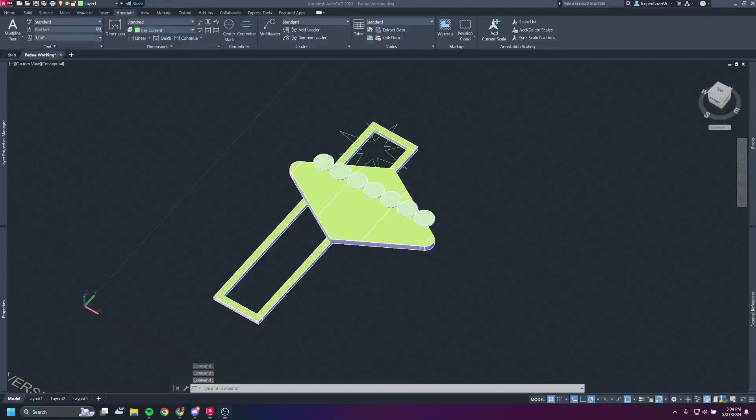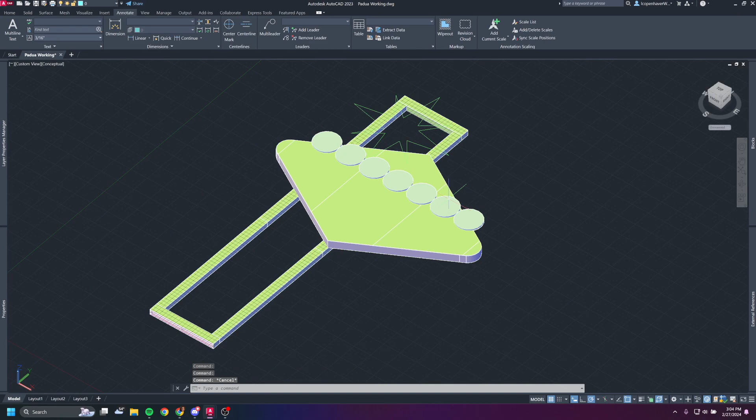Okay, I'm gonna record myself doing this thing so that maybe y'all can learn things or whatever. Oh man, okay, so this is grouped. Locked? Whatever. I'm just gonna copy and paste this into a new document because that's what you gotta do. New.

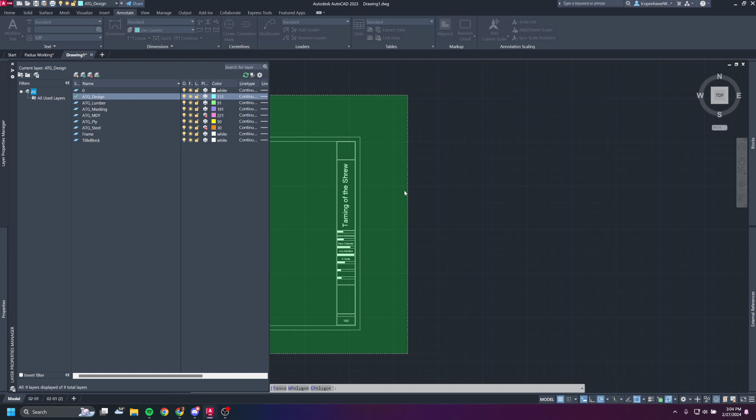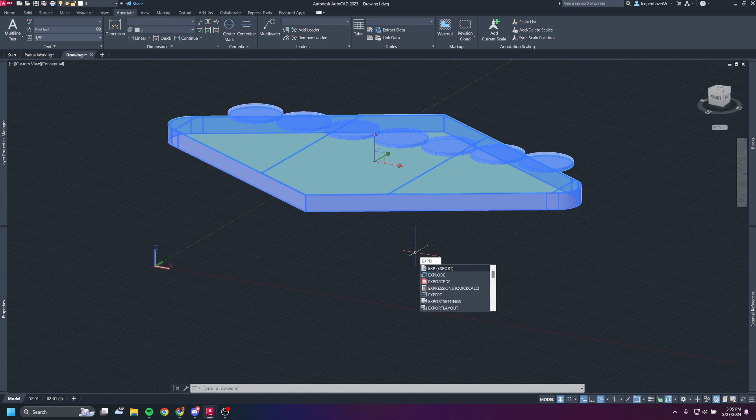Come on. Oh. Get rid of that. Oh my goodness, there's more. Get rid of that. Copy and paste. Put it at 0. Hello. ESC, so I can understand what I'm seeing. Alright, this is a block. I'm going to explode it so that I can get the different bits and bobs.

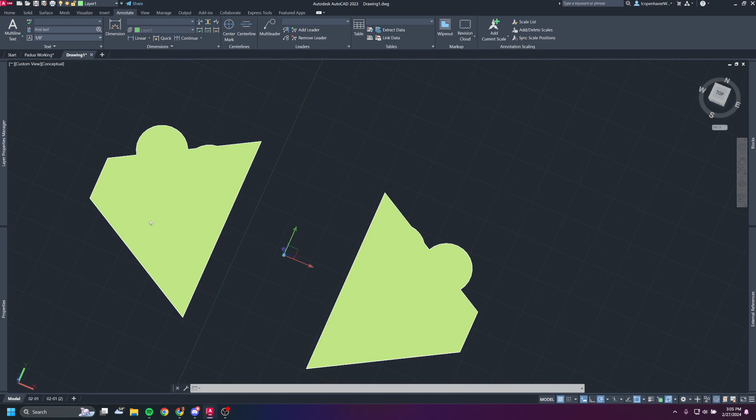I'm going to get that, get rid of it, get that, get rid of it, which leaves foam, nice, and then this fella, and also this fella, great, this fella, and these fellas here. I did not check if the seam catches have been updated. I really hope they have. If not, that sucks.

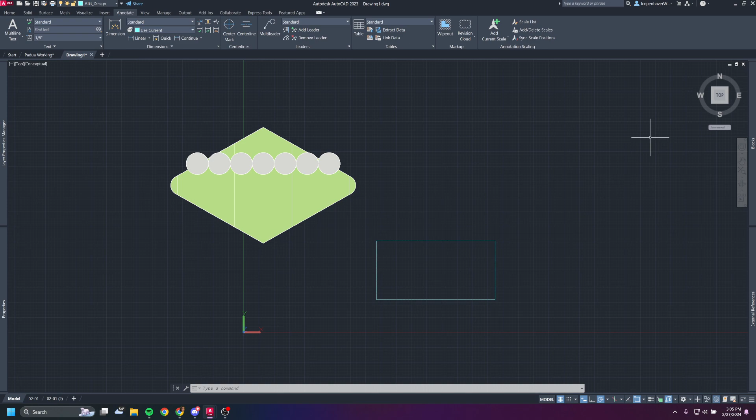Alright, the first thing I'm going to do is figure out exactly how these are going to fit onto sheets. So to do that, I'm going to give myself a template, or just like a representation of a sheet. The sheets are 97 by 49 because they just are. I'm going to put that at 0, 0. Oh, 0, 0. There it goes.

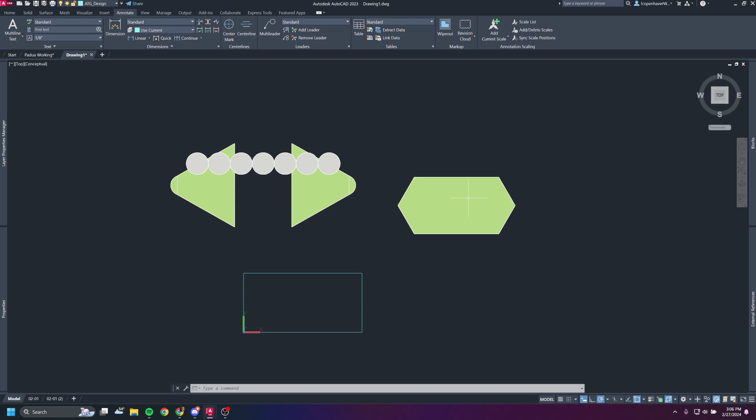I'm gonna turn some of this other stuff off too. Whew, my eyes are so much happier. So I'm just gonna take this and basically put it in the right place. And anytime you're doing this, it is a good idea to take the whole thing as it's going to be assembled, and then literally put all of the different parts where it needs to go, even if those parts are like multiple copies of the same thing,

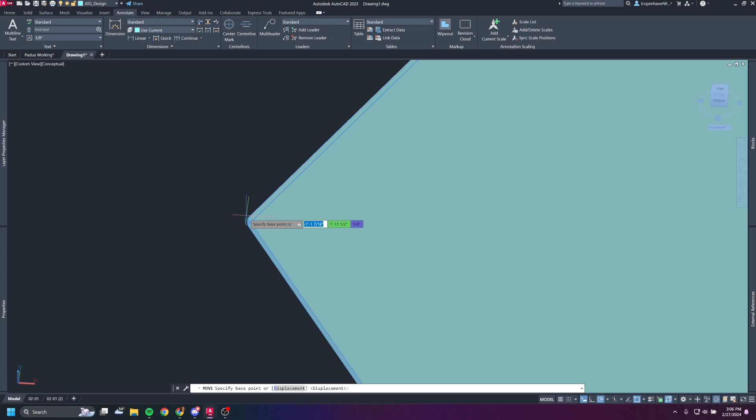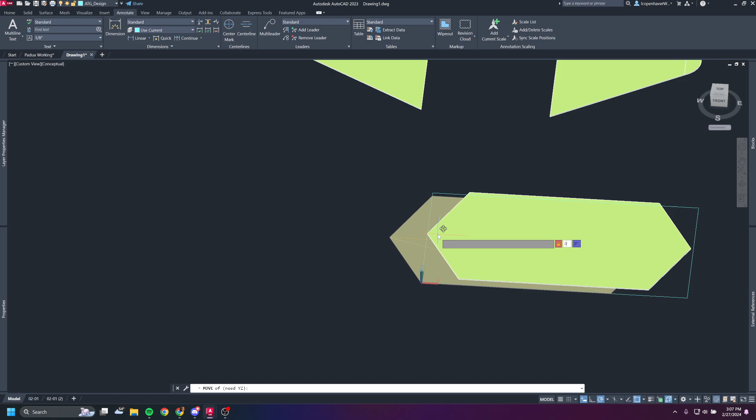because you want to make sure that you have the right quantity of them for the entire project. And it's frustrating when you make silly mistakes like miscounting things. So I'm moving this so that it's not on any edges in particular. We want to make sure that the CNC is actually getting the right cuts.

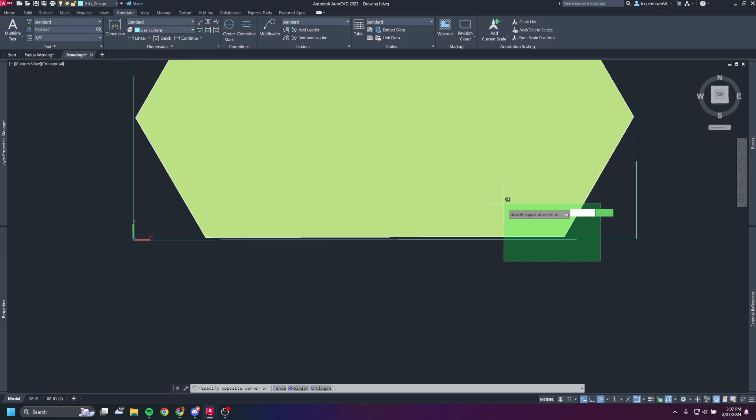So if this is up against the edge, but the sheet is on the CNC ever so slightly off, then it's not going to be accurate. So we want it to be accurate. So therefore, leave edges, friends. Move that another half inch. Half inch is plenty. You don't need to worry about more than that.

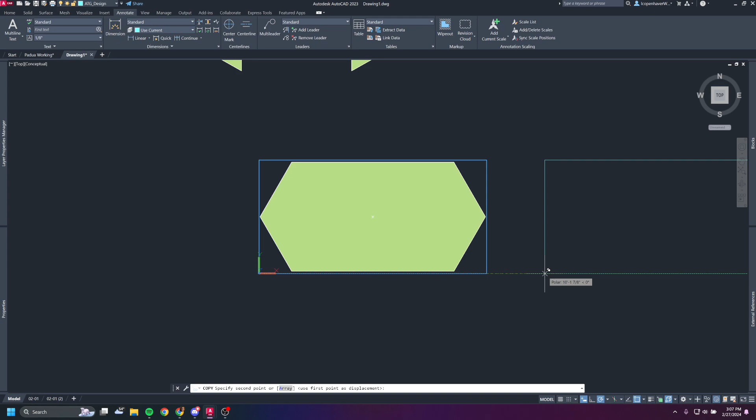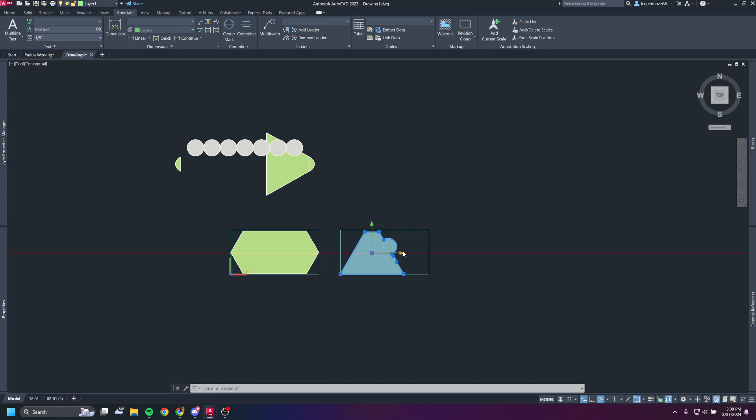I'm going to duplicate this, and I'm going to move it 120 inches. It doesn't really matter exactly how far you go, just as long as it's more than the width of your sheet, and it won't overlap.

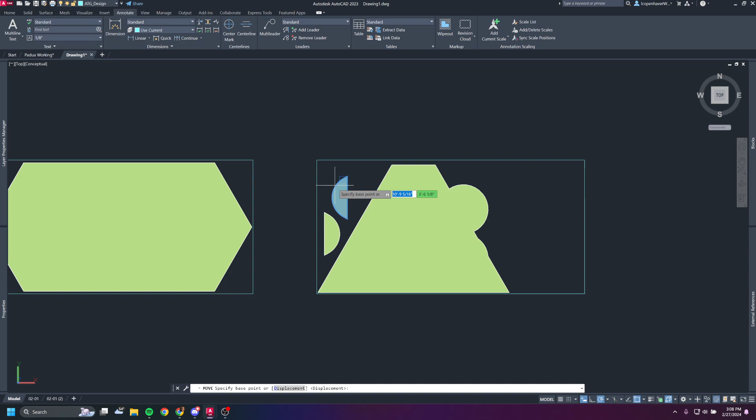Since the material we're using is MDF for this, we don't have to worry about grain orientation. When we do the layout for something like

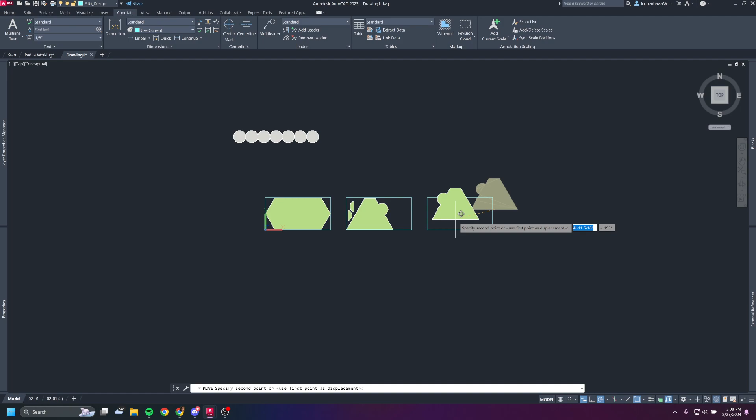I don't know why this is so choppy, but it's super choppy right now, and I don't care for it. Yeah, that's fine. Alright, I'm going to hide those.

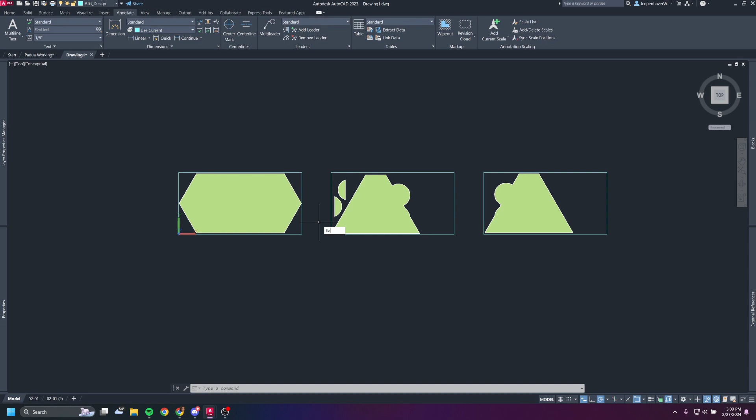Alright, I'm going to do a thing right now called Flatshot. And Flatshot is just going to take the image of whatever is there, and then make a 2D representation of it. It's really important that you're in the correct orientation when you do this. I'll show you why in a second. I'm going to put it at 0, 0, 0, 1, 1, 0.

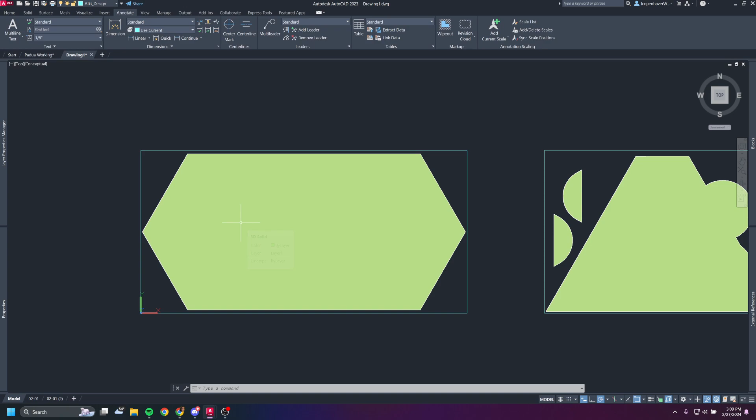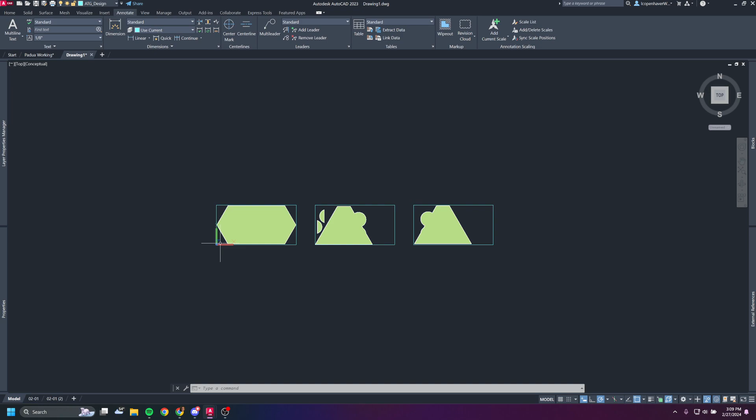Oh no, did it not place it? It did not place it. Fart. One, tab, 1, 0. It didn't like the tab. So now I can get rid of those, and what we have left is a block of those flat shapes. You need to do that because V-Carve doesn't like three-dimensional shapes.

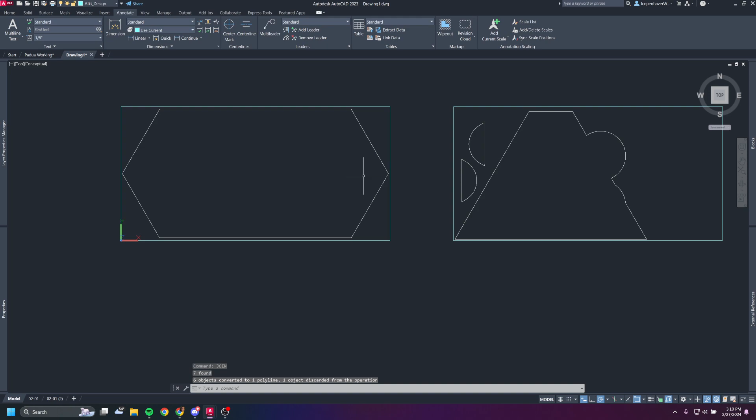I need to make this not a three-dimensional shape, so I'm going to explode it, and then I'm going to join it back together. When you join it back together, you want to make sure that it will extrude. You do that because if you don't, and there's an open line, then V-Carve will not understand which side of the line you want it to cut on, and it will be sad.

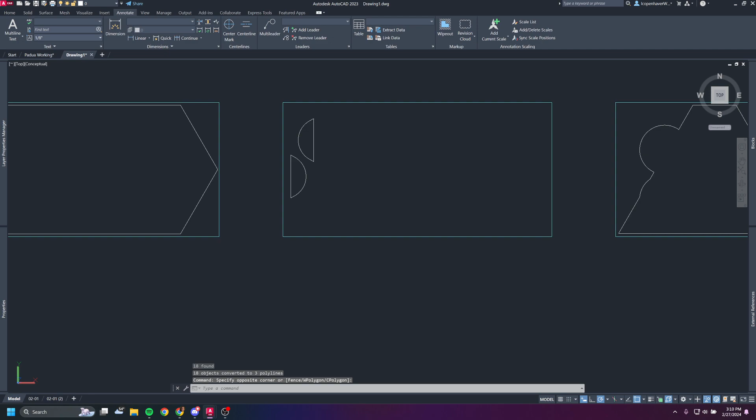For the most part, this is usually just an exercise in exploding it and then joining everything back together. Sometimes it gets pissy and then you have to do a boundary command. In this case, it's fine.

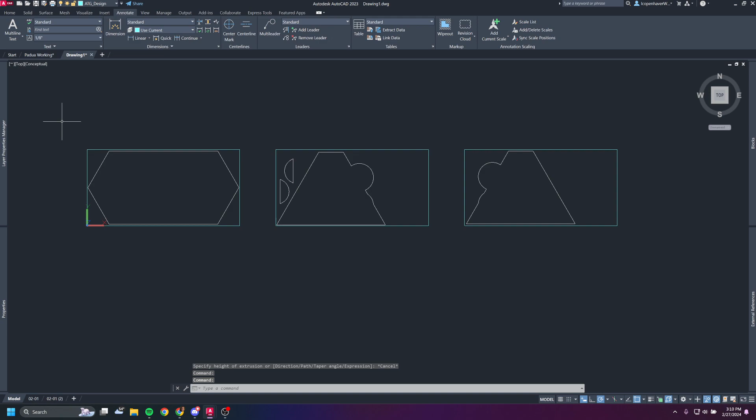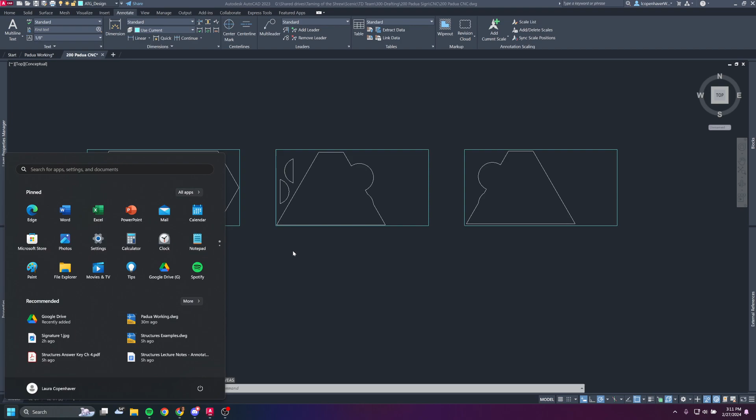Great. So now that I have that, I'm going to save this as, I'm going to put a new folder in your thing that's called CNC. I'm going to name it something that's logical and save it as a 2013 file. And now I'm going to open V-Carve. We're going to open an existing file. And it should open. Nice.

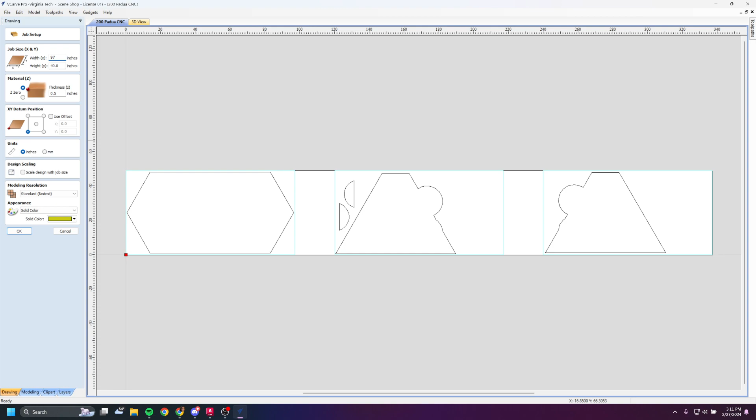So this first page is where we tell it how big the material is that we're going to use. I'm going to set that to 97 inches. The thickness is 1/4 inch because we're using 1/4 inch MDF. And make sure that the Z0 is to the bottom of the material. That's the same thing as going to the CNC bed rather than to the top of the material.

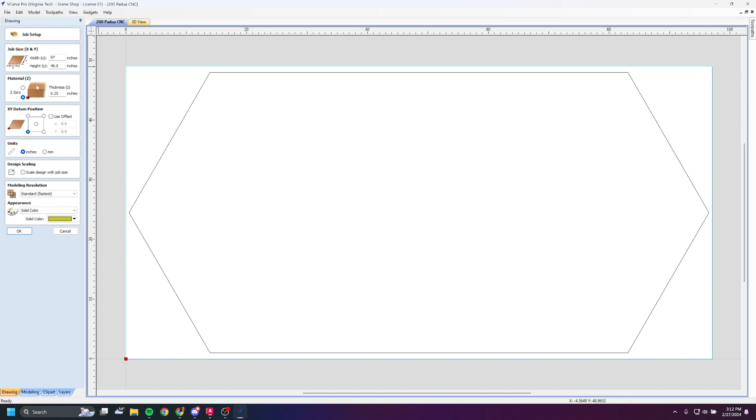We do that because that way we only have to zero it at the beginning, and it's also better if you're doing through cuts, which is exactly what we're doing. The rest of this can stay. Just make sure that your main material size is correct, that your Z0 is correct, and that your thickness is correct. Then click OK.

We're going to open toolpaths right here, pin it open, and then I'm going to start selecting the paths that I want it to cut, and then start creating toolpath operations. These are a whole bunch of different things that it can do. For this one, I'm just going to cut a profile. That means to cut outside of an edge or inside of an edge.

So start depth, leave that at whatever it is. Cut depth, however deep you want it to go. So in our case, we want to go all the way through, therefore 1/4 inch. You need to select which tool you're going to use. In this case, we're going to use a 1/4 inch end mill. That'll let us cut a little bit faster. And since we don't have any tight inside corners, it doesn't really matter.

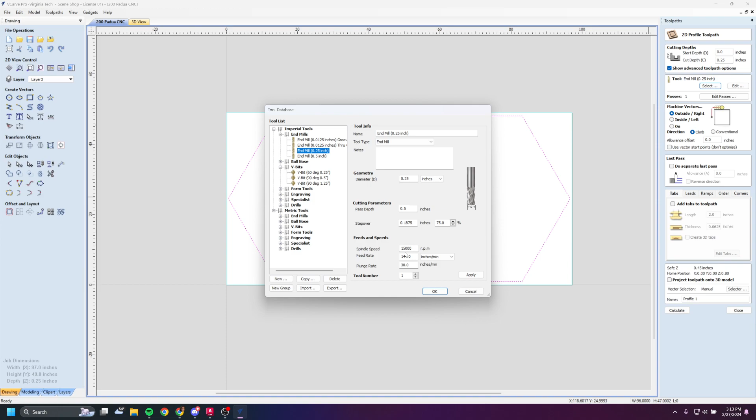If the thickness of the line is important, or if the smallness of the corners is important, then you can change size. But for us, it doesn't matter. I think I'm going to leave this stuff where it is for now. I have been known to actually sit down and calculate this stuff and up my feed rate, but for now I'm not going to go into that. Just leave it what it is.

The next field is, oh, we do need to talk about this. The rule of thumb for cut depth is that your cut depth can be as much as 2 times the diameter of your bit. So in this case, I could make a 1/2 inch deep cut. I'm going to be honest. I think a lot of times that results in cuts that don't look very good and they're not very clean. So I would rather do a second pass, especially on something that's this easy.

Don't bother making it super fast. Make it look good so that it saves you time later. Like you spend less time having to clean it up. So in this case, it doesn't matter. We're using a 1/4 inch to cut through 1/4 inch material. 1 pass is fine. We're going to do outside right. That means that the bit is going to travel on the outside edge of this line all the way around. And then we'll leave this at whatever it is.

We could totally talk about this. I can tell you in person. I just want to leave it.

For something this large, I can almost guarantee that we're going to put a couple staples through it, which means that I don't have to worry about it moving around on the board. And by staples, I actually mean composite nails. They're not the same, but we're just going to say staples. For something smaller, we would probably want to do tabs. For this, I'm just leaving it at what it is. I'll show you tabs in a minute.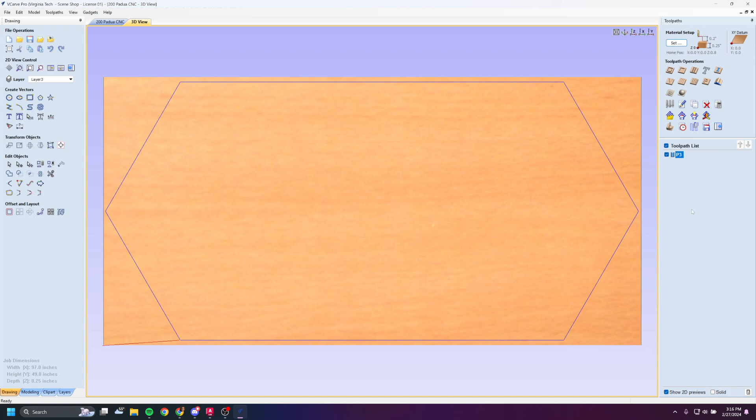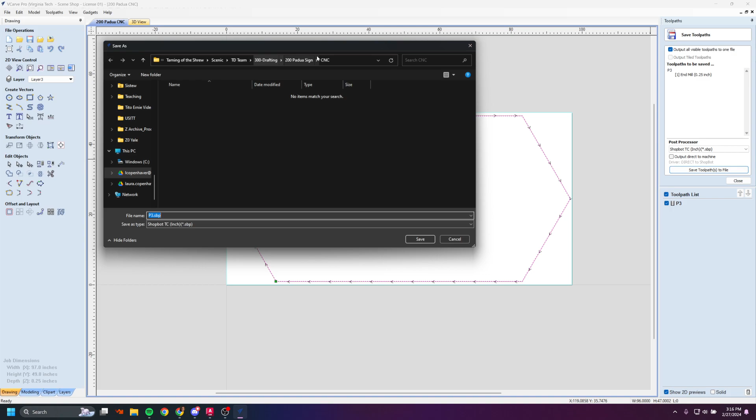Honestly, if you find this useful, great. Preview the toolpath. For me, I've done this enough where I don't feel like I need to preview the toolpath all the time. I have the confidence from lots and lots of hours of doing this to not. Once I've done that, I'm going to click back here, select the thing that I just made, and then save it. And this should say ShopBot TC inch. Toolpaths to be saved. This one, just give that a quick once over, make sure it's correct. Save toolpaths. And I'm going to put it in that Padua sign folder as well. Close.

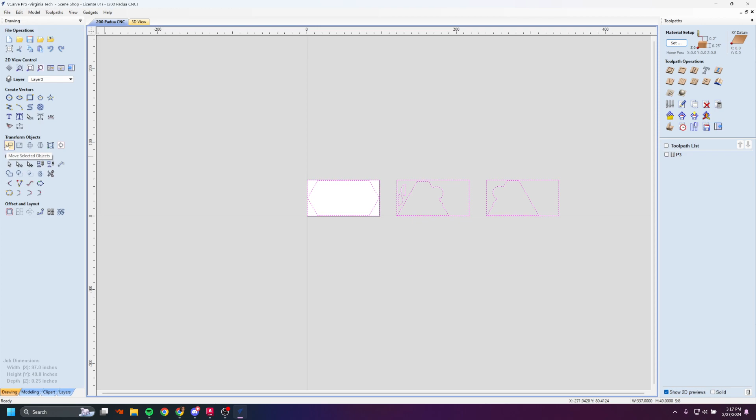Deselect this. And scroll out. Now what I'm going to do is take all of this stuff and move it. So I'm going to click Move Selected Objects. I'm going to select Relative. And this is where that moving the sheet thing comes in. I'm going to say -120, whatever that known distance is. And now it's aligned for the next sheet. I can close out of this.

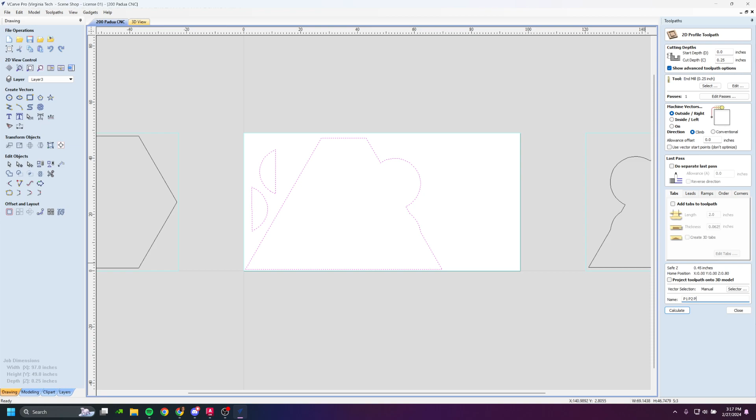I'm going to select this stuff. And since I'm doing a bunch of through cuts, all of this can stay the same, and it should stay the same; it will pop up the same as whatever the last setting was. So this is the first piece, second piece, third piece is over here, fourth piece is here, fifth piece. So this is going to be P1, P2, P5. I'm going to hit calculate.

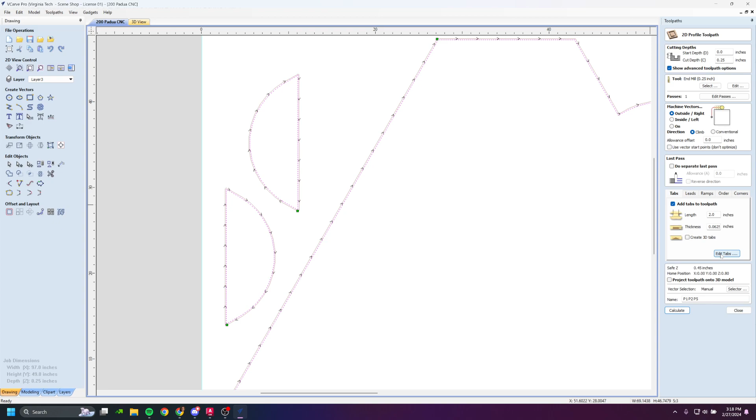Oh, I forgot something. I forgot tabs. For this large one, it's probably fine to just leave it as it is. I don't need tabs. For these smaller guys, it is likely that they will not have anything in them. So that means I need to add tabs. I'm going to click there, and then say Edit Tabs. Now, I could just have a constant number, add tabs, or, see how my cursor has changed? I can just go in and add tabs where I would like. Click there, click there, click there, click there. And 2 is plenty to hold that in place for as long as I need it to. I'm going to say close.

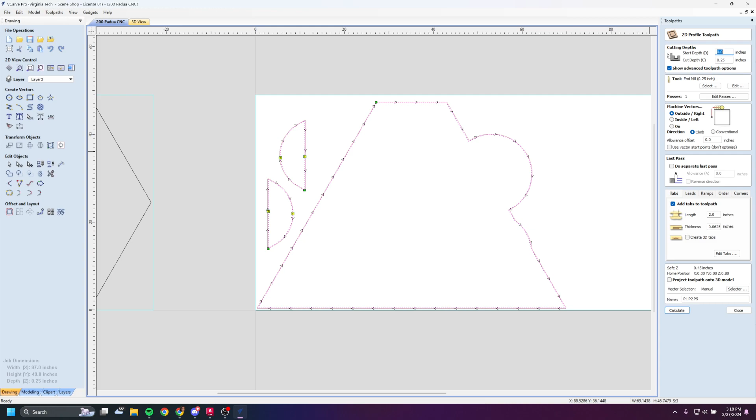Do pay attention to this. You can change the dimensions of those tabs. I like to do a really thin one so that it's barely holding on. Most of the time it's plenty. Click calculate. If you wanted to preview it, you could. I'm going to hit save, make sure that it's correct. All of that looks right. Save toolpath. Save it. Close that. Move on to the last one.

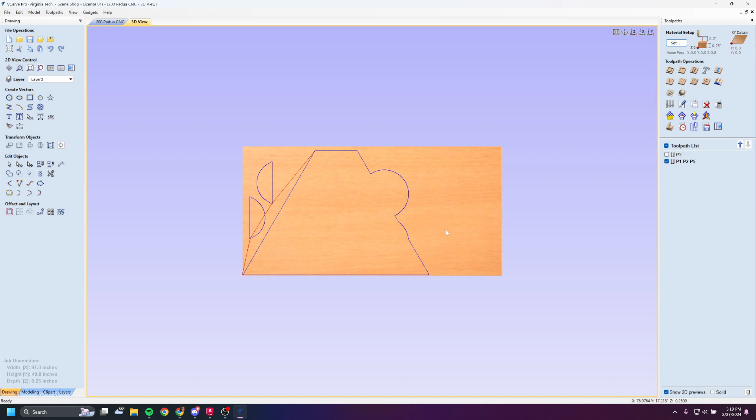I'm going to deselect that so I don't have to see it anymore. Ooh, stop. There we go. Now I can move these again. -120. It's in the right place. Nice. I'm going to select that. Toolpath again. Outside, all the same things. This one is Padua sign number 4. I can hit calculate. Close. Save it. Done.